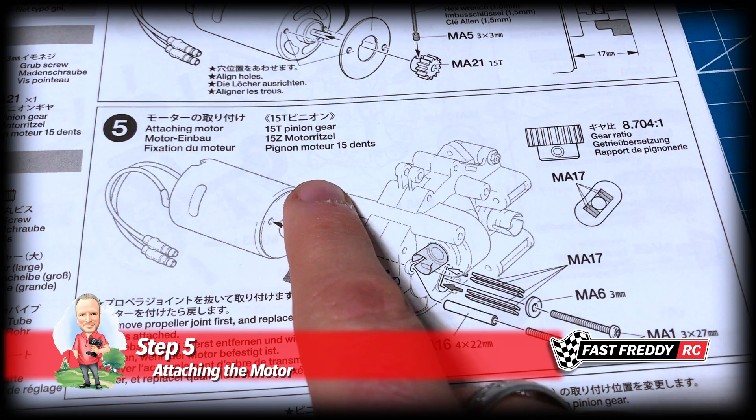So for step 5, attaching the motor. Well, we're using the 15-tooth pinion gear, so this step is correct for us. Now, why does it matter? Well, depending on the pinion gear that you use, there are these set plates that will determine how the motor is going to be attached to the gearbox.

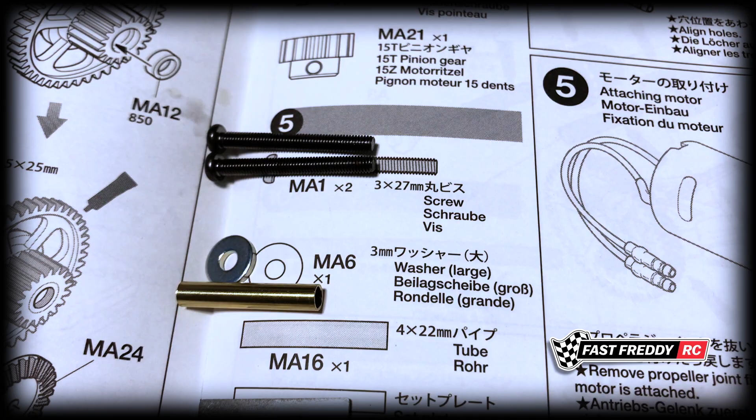So you can see these set plates right there. There are 4 of them, and of course there's some of our other things for this step. We've got the tube, the washer, and the screws. But because it's a 15-tooth, you can see that we're going to use 2 on one side of the screw and 2 on the other.

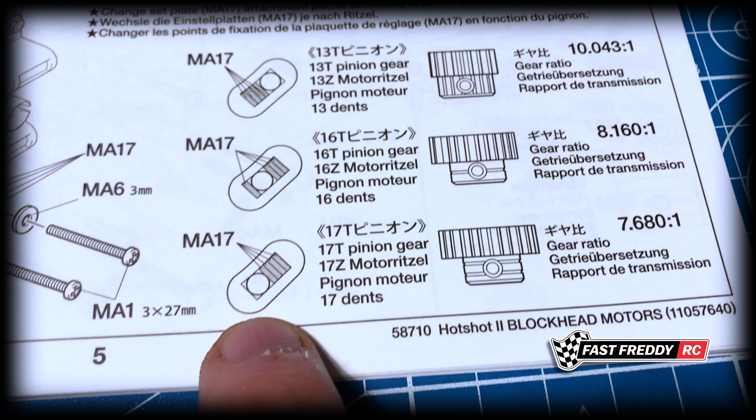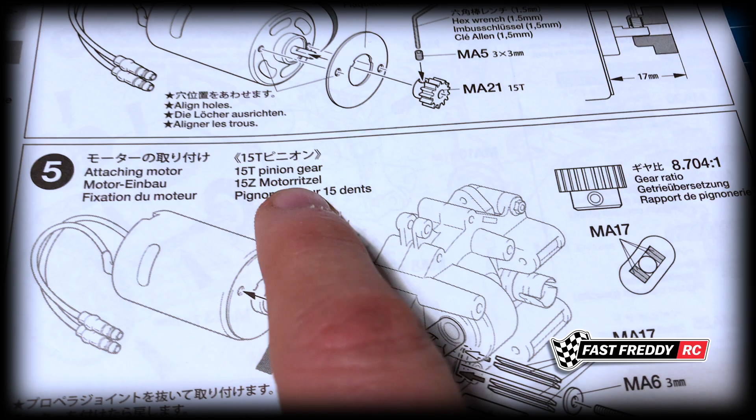Now, if we were using some of these other choices, the 13-tooth is going to have all 4 of the set plates and then the motor. This one 3 to 1, and this one 4 on one side and the motor on the other. So in other words, this placement is determined by what pinion gear we're using. So again, in our case, we've got 2 aside and the screw goes through the center, just like that diagram shows. So I'll set this up and let's put this on.

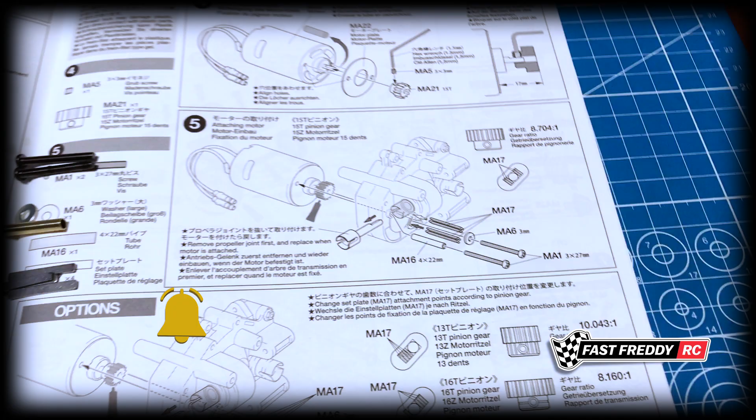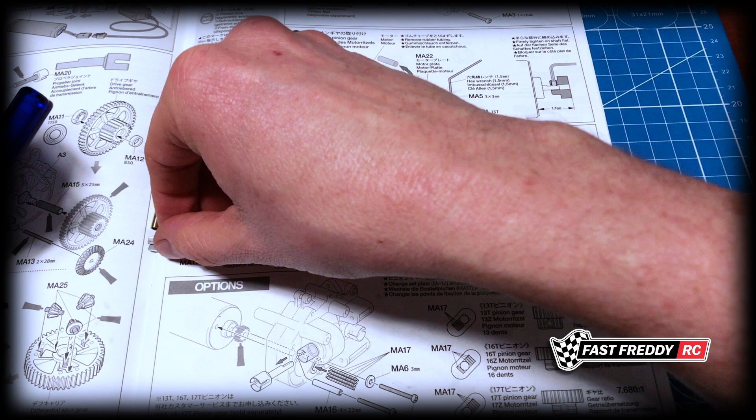So first off, let's put the main screw in. So you can see here that you've got this hole on either side, and the set plates have to go on either side of the screw. So if we put one in, and I've got my finger on the other side just so that it stops it from sliding through, and we grab another set plate and put that one in there.

And I'm going to turn this around, and I'm also using this tool that comes with the Tamiya kit to push it down into place, just to make sure that it's sitting level. And now we can put the screw, and I've put the washer on. It's got to fit on one side, and now I can use the screw and hold that in at this side, and we're going to pull that down. And now we're going to slide one of the set plates in there.

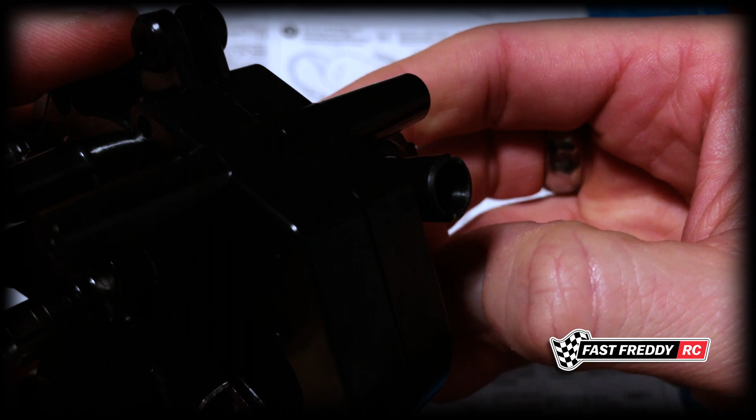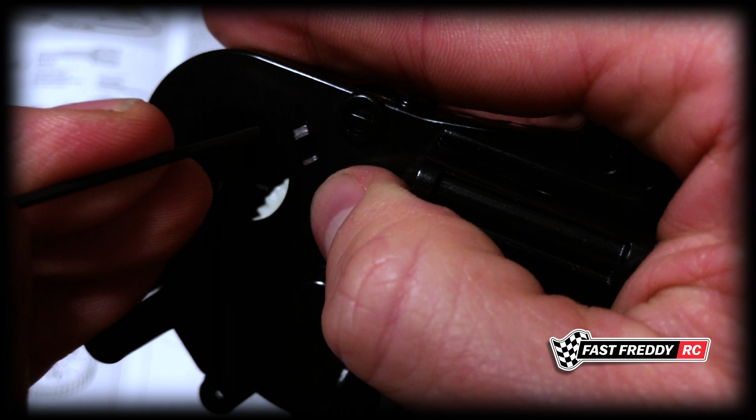In fact, for whatever reason, this is mine. You may not discover this, but mine seems to be a tighter fit. So I'm having to use a tool to push these plates into place. Because normally they're loose, and the reason I say that is I'm building the Super Sabre at the same time, and this part of the gearbox is pretty much the same. But in the Super Sabre, all of this was super loose. There's no way it would have sat like that.

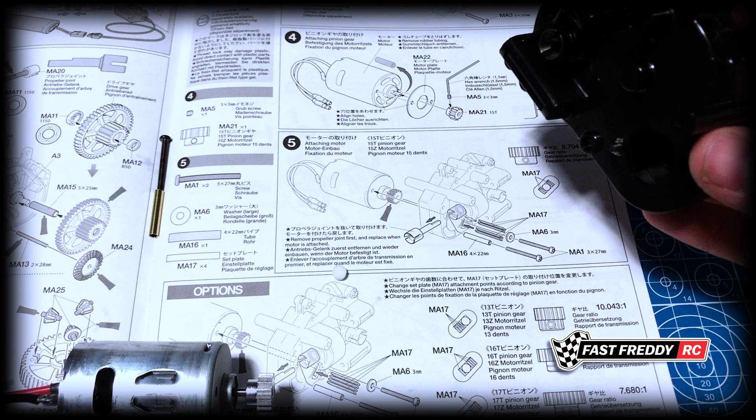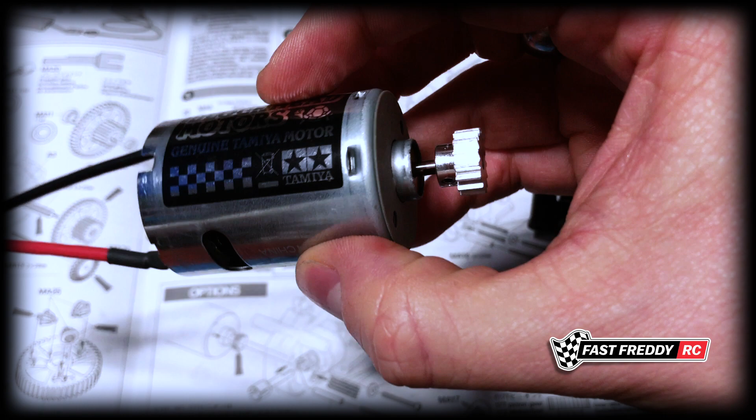So anyways, by doing it that way, we can now slide that through and in between. There we go. So ultimately, it's going to look like that. You've got the 2 set plates on either side and then the screw, just like that. So now what we can do is we can put this in. And again, I'm going to make sure that it's just the one hole on the one side, and we're going to put that way. But before we do that, we're going to add more grease to the pinion gear.

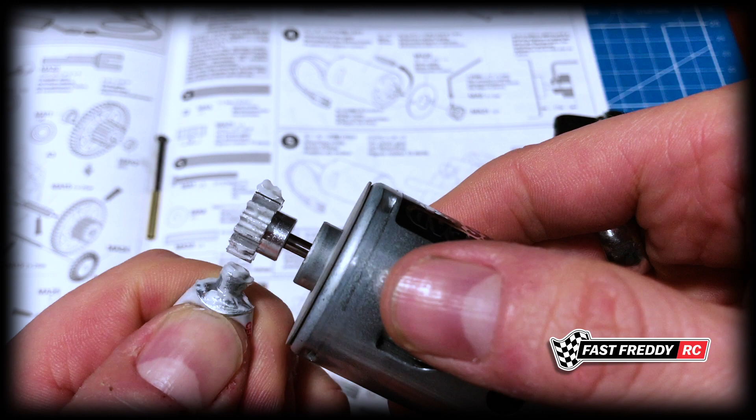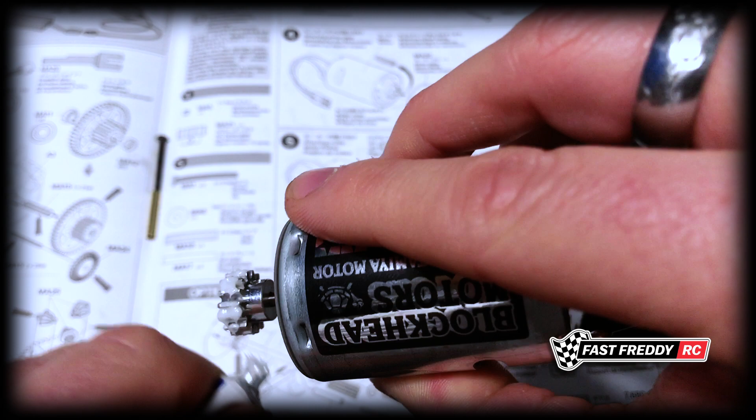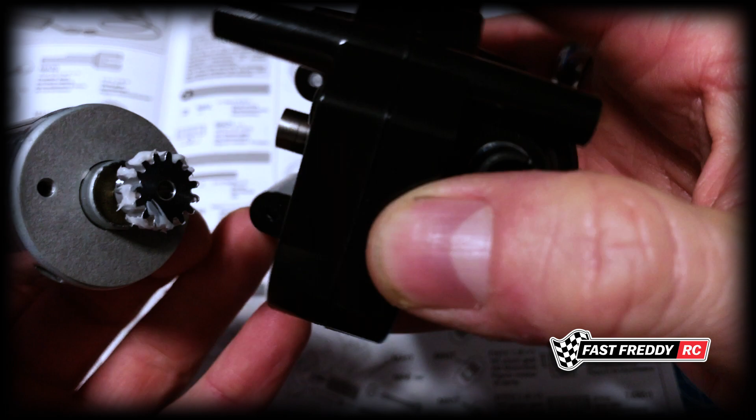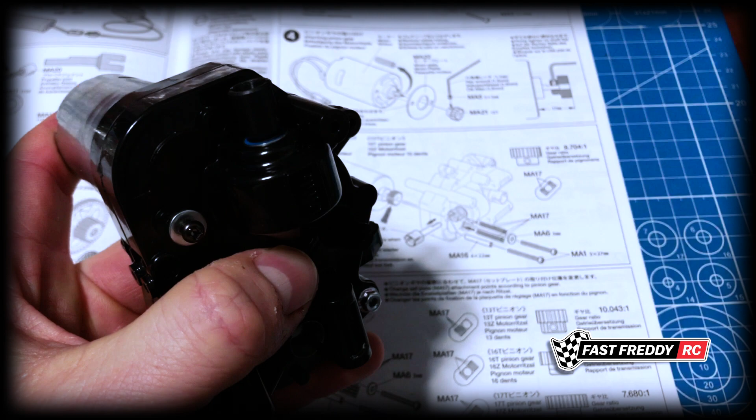I know I've got lots of grease on the drive gear, so I'm just going to spread that around, and there we go. So again, I'm going to grab this, we're going to put that into place, and that screw hole right there needs to match up with the bottom. So we can actually turn this upside down, make sure that we're matching that hole. There it is. And now I'm going to use the screwdriver to screw that one in place.

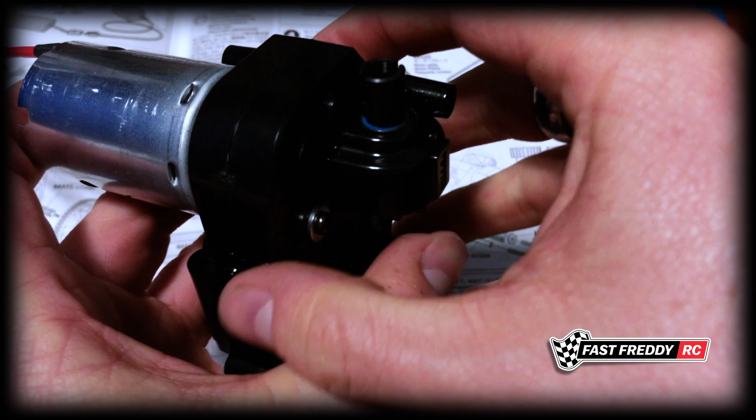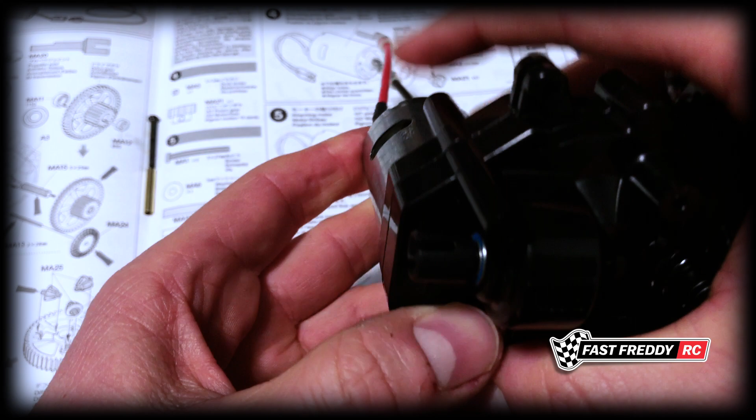Now, I'm not going to go all the way. I just want to make sure that it's in place. Okay, so it is. Now, for this one, in order to get this next bit in, you have to remove this propeller joint out again. And if you remember, it was a pretty tight fit for some reason. In fact, it doesn't necessarily want to come out, so I'll just give it a little help.

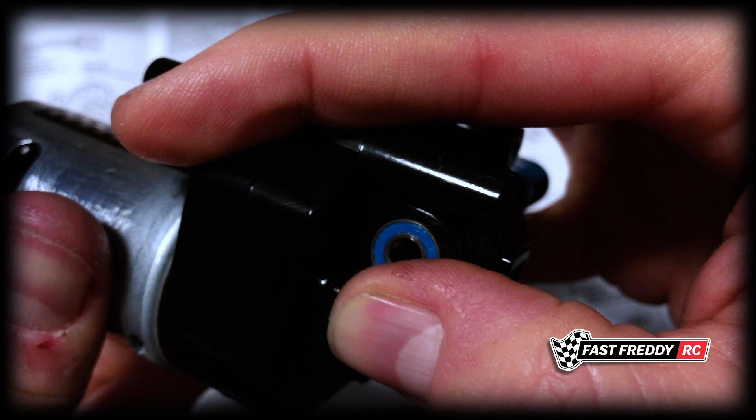There we go. And what we need to do is be able to put this brass tube right through there, and then we have our screw that has to go through that and into the other hole of the motor. So I've got to find that hole. I think we've got it. Now we can screw this in. But it's obvious it hasn't found the hole. There we go.

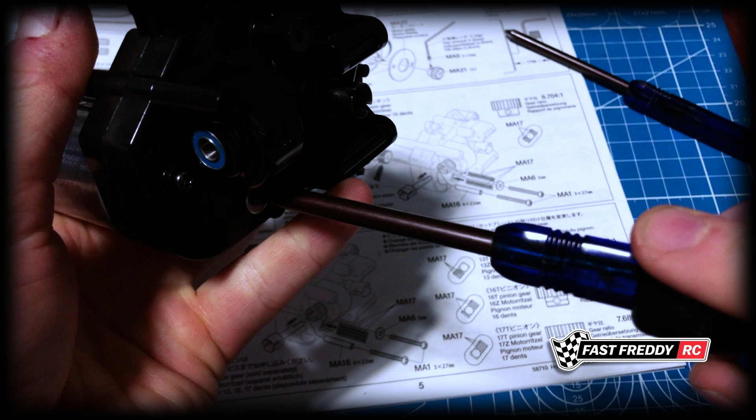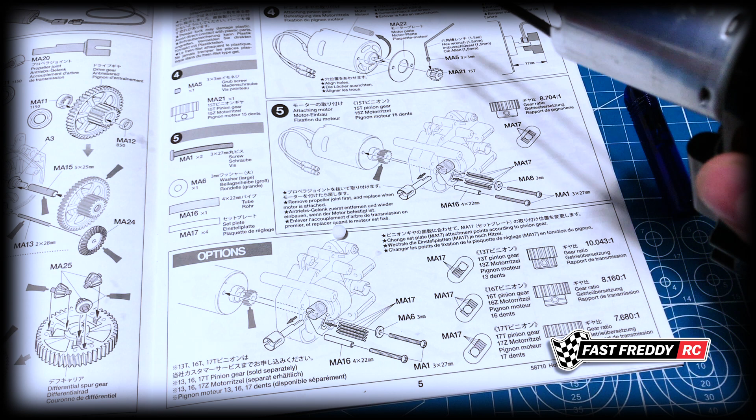Okay, so now that we know that, I'm going to switch the screwdriver and we're going to tighten this all up. And don't over tighten, but just make sure that it's definitely on there fairly tight. Yep, I'm good with that. So the last thing we do is we put our drive cup back, and you'll notice down there that the flat is this way, so that's how it's going to have to go back.

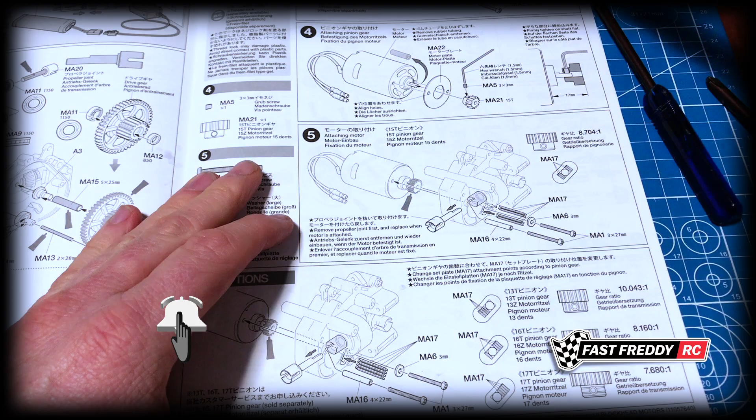And there we go. So there is our motor attached to the gearbox. And the pinion's all set correctly. Oh, and that's come out again. So, I don't know. I think they should have saved this for later to put those pieces in, because they seem to want to keep popping out. But there we go. There's both of them on either side. So, step 5 is now complete. So we can now move on to step 6 and work on attaching the gears with the front gearbox.